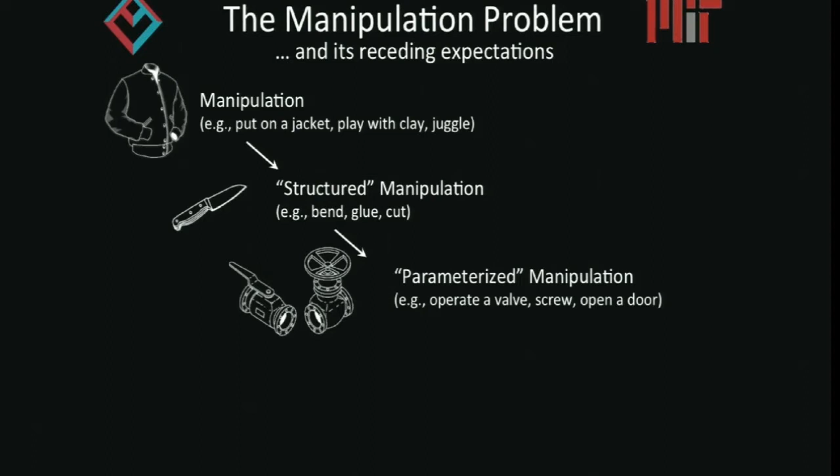You can go down a bit more to parameterized manipulation, where objects now live in parameterized configuration spaces. Imagine operating a valve, or turning a key, or a screwdriver, or some sort of rigid tool that moves along a certain path. Getting robots to do this is still a problem - we don't have good ways to design policies or plans to get robots to execute motions or actions like this robustly.

So we go down further - okay, forget about using whatever you're grasping, just think about grasping. How do we get an object into the hand of the robot so that hopefully then we'll figure out what to do with it.

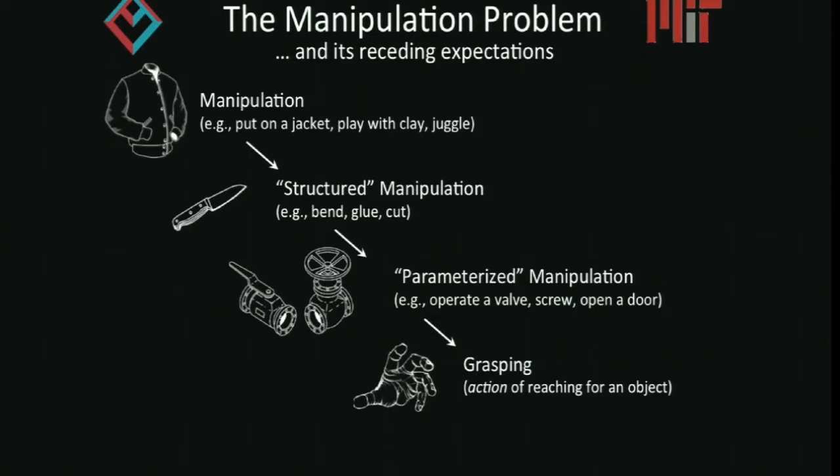And by grasping, I mean the entire process of approaching the object and thinking about all the dynamic contact interactions between the hand, the environment, and the object as you're closing on it. That's still something we don't know how to model, simulate accurately, or plan for.

So let's just think about grasp. I have some contacts on the object, and geometrically I can understand whether it's a good, better, or worse grasp. This is a problem where we've gotten some traction over the last 40 years, from geometric analysis all the way to neural network approaches to model grasp stability, but there's still big work to do.

More complex problems. So just as motivation for the rest of the talk, I want to give a little briefing on the work we did on the Amazon Robotics Challenge this last year, to illustrate, I don't know if we'd call it state of the art, but close to what grasping systems might be working like today.

So the Amazon Robotics Challenge, in case you haven't seen it, the basic idea is you get a container filled with objects like this, and you need to design an autonomous system to pick all these objects, identify them, and then put them in storage. And you have to do it fast and reliably.

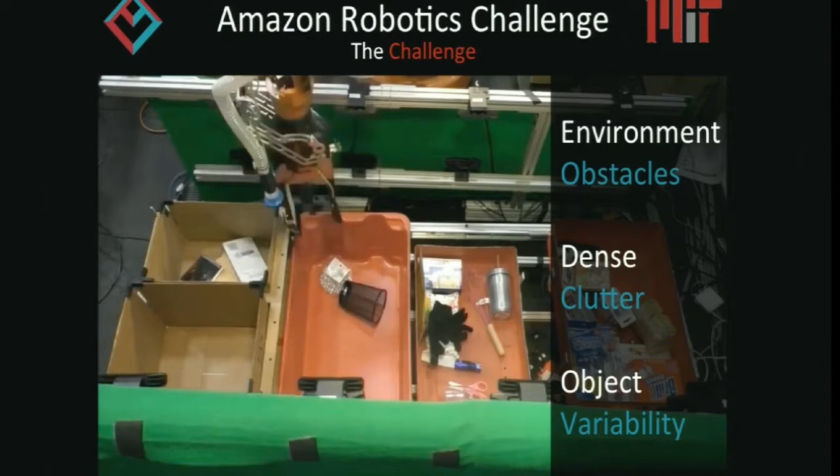Okay, so quickly, this is one possible solution, what we presented in the challenge. There's an arm, a gripper, some cameras, and a control loop. There's a computer driving the entire thing. So when you want to design a system like this, a pick-and-place system, you basically have to answer four questions that are completely interrelated.

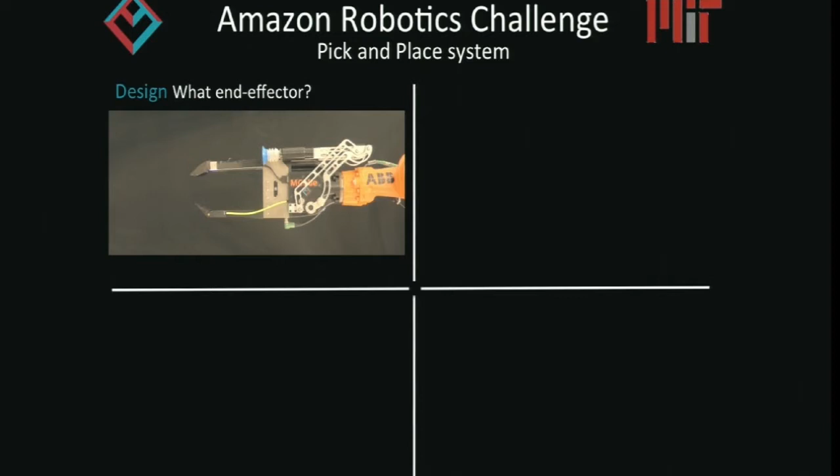So the first one is a design question. What end effector are you going to use? What is it physically going to touch the objects that you need to pick? Are you going to use a gripper or a suction cup or a combination of both? What are going to be the degrees of freedom? In our case, we decided to use a task-based gripper design.

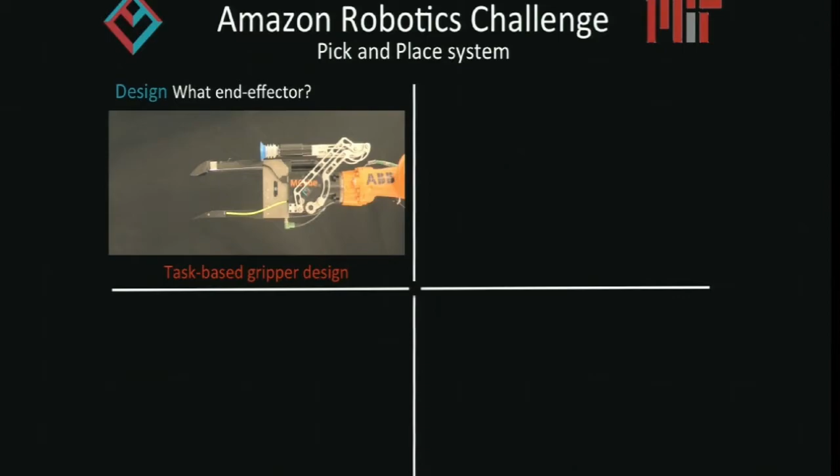Okay, cool. The idea is that you can incorporate some of the constraints of the task into the design of the gripper so that the task becomes simpler. So there's force control when it closes, and there's a spatula here that is compliant so you can touch things safely and squeeze in between objects. The suction cup goes far enough forward so the rest of the gripper isn't an issue when dealing with collisions. Anyway, you input task constraints into the design of the gripper.

The second question is what I would call manipulation. What is going to guide the design of the particular interactions between the gripper you chose and the objects? Are you going to use some sort of contact-based planner? Are you going to think about force control, or about the particular interactions in any given way? In our case, we decided to simplify the problem by looking just at a particular finite number of primitive behaviors.

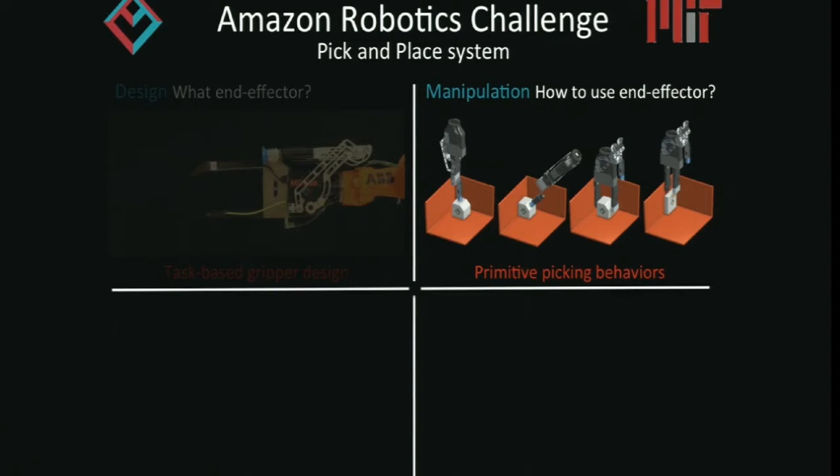So we thought, okay, if the objects are going to be inside this tote, and if the objects are going to be of these particular kinds, we think we can pick them all just by looking at suction down, suction side against a face, grasp down, and then flush grasp, where one finger gets in between a wall and an object. Each of these behaviors has its own planner, its own controller, and its own perception system, which I'll talk about in a second.

The third question is, once you have a gripper and you know how it's supposed to interact with the object, how are you going to use the robot to make sure the gripper can follow that path? How are you going to avoid collisions? How are you going to make contact in a safe way?

So you can avoid collisions by forcing the robot to move in safe zones so that you don't have to do collision-free planning, just for speed. Whenever after picking something, it just goes up and on top of things so you know it's never going to collide.

And we can make contact in a safe way by having guarded moves. So we have sensors that tell us the moment it makes contact so that you can directly react after that.

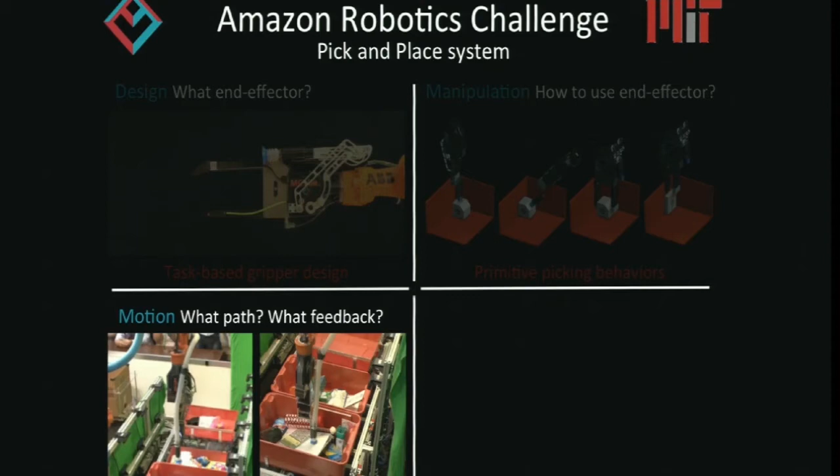And the fourth question is perception—where is the object and what object is it? This is a problem where standard research solutions are difficult to use. The standard pipeline of segmenting an object, identifying its pose, and then planning a grasp for that object is very noisy, because it's very difficult to segment something like a toothbrush from everything else when it just becomes clutter.

So instead, we decided to use techniques developed in the last few years based on affordance prediction for each one of the primitive behaviors. We train a neural network to say this area is more likely to be suctionable than that area over here, and we get the neural network to predict dense affordance maps for each one of the primitive behaviors. Okay, so maybe a bit more in detail how the system works.

There are two problems we need to solve. One is grasp selection—we need to come up with these affordance maps. And the second one is object recognition: after picking the object, we need to make sure that we pick the object we really wanted to pick. So this is what they...

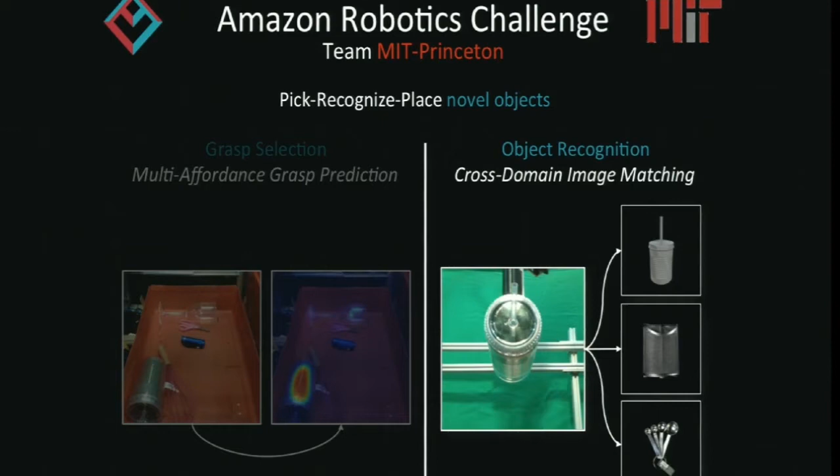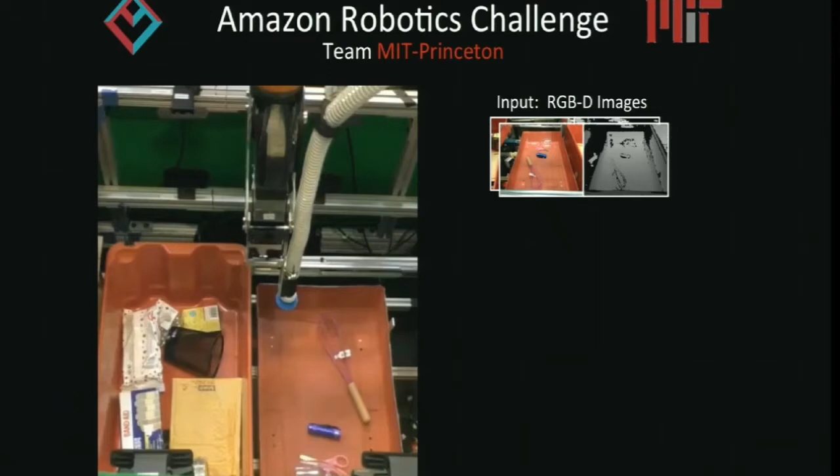So this is one particular moment in the challenge, and we get RGBD input images to the system—what the camera sees in RGB and depth. We pass these images through the neural networks to do affordance prediction on the things that look suctionable and the things that look graspable for different orientations of the gripper. We merge the heights and rotate them in different orientations to make the prediction of these affordances for each picking behavior.

Now, once the controller receives these predictions, the idea is I just need to look at whatever is more likely to succeed, and then go with that. In this case, it looks like this is the highest point from all the options, which corresponds to this grasp, and then the robot goes down and picks it.

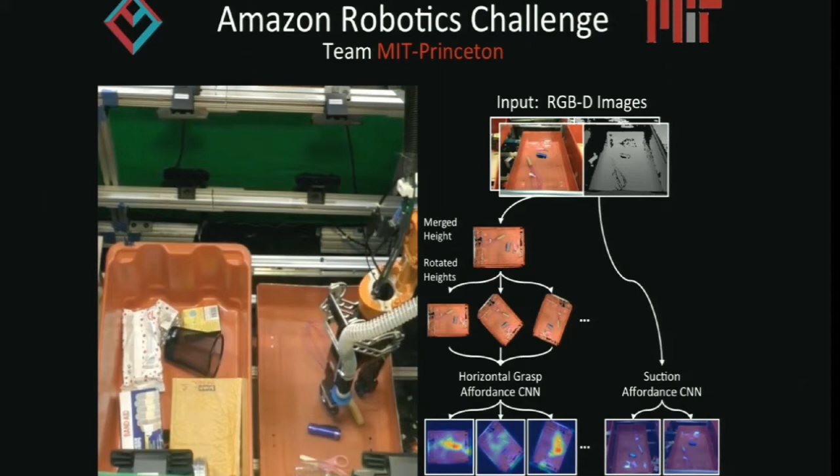And after that, it goes back up and shows it to the other cameras that do image recognition. It looks at this object and has to decide which one of the database of objects it is, and hopefully it makes a good prediction.

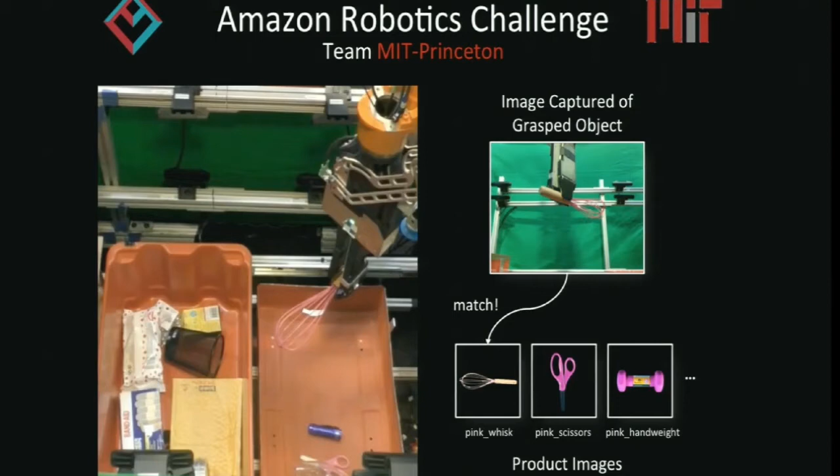This is also done with a neural network interface where we learn a feature embedding, where images like the product images look like the kind of images we capture in real time.

Why do we do this? Why do we need to learn a feature embedding? Because we've never seen these objects in real time—the only thing we have are product images, and matching directly from here to here is quite noisy. So how do we solve that problem?

We go to Target, buy about 250 objects, and get training data for these kinds of matches. Then we learn a feature space where they look as close as possible—where these two images map to as close as possible to the same cluster. Then in real time, we get a new object with a new real image, and hopefully it will get as close as possible in this new feature space.

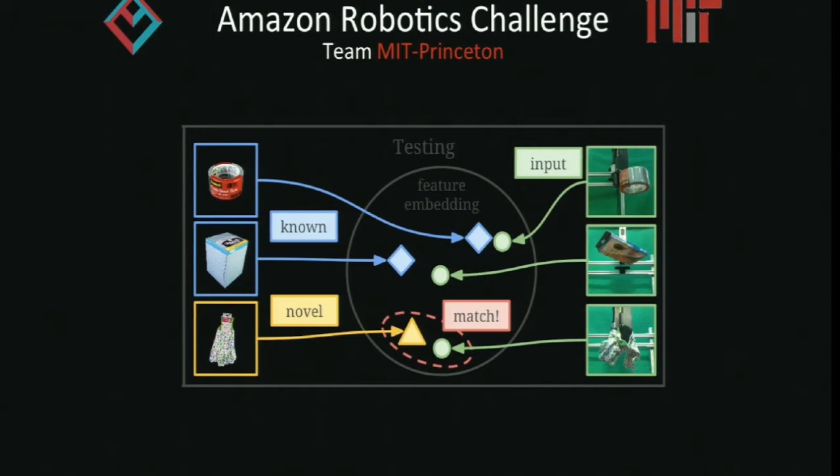I'm happy to talk more about the details. Once you answer these 4 intertwined questions - the decision of how you're going to use the end effector affects its design, and vice versa. The perception is designed for the particular behaviors you pick, and the path is influenced by what areas or surfaces of your end effector will make contact and where collisions need to be avoided.

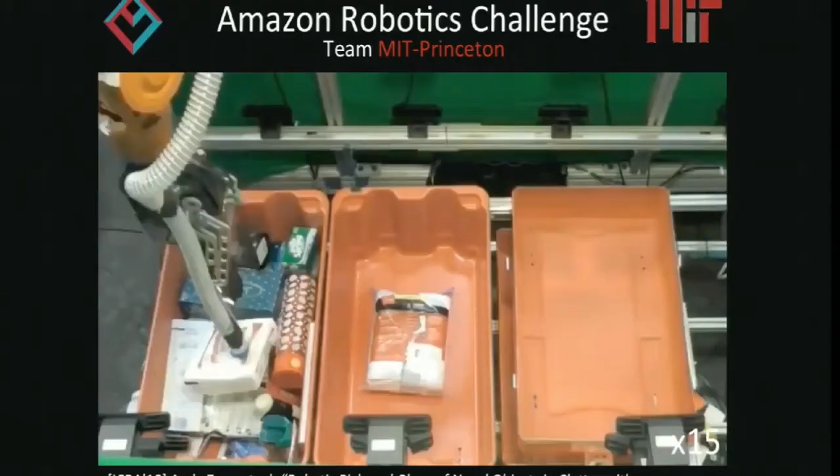But once you answer these 4 questions and spend a couple extra months debugging and improving the system, you can do runs like this. This is the official run of the competition's stowing task, where the goal is just to pick up everything and move it over here. This is sped up 15 times, so not quite 400 picks per hour yet.

So what is the key differentiating factor between this entry and other entries from the teams that participated this year in the challenge? I would like to say the key factor was that we were more clever and came up with a better system, but that's a vast simplification. It's not just that we're clever now.

There were a few things, right? The design of the gripper actually makes a significant difference - how mechanically robust it is and how much gripping force you can get while still being robust against overusing it or making collisions. The second thing is integration - to get this system to work well and run fast, you need to spend time trimming things down and making sure the output of the perception algorithm is compatible with the planner and the controller and everything.

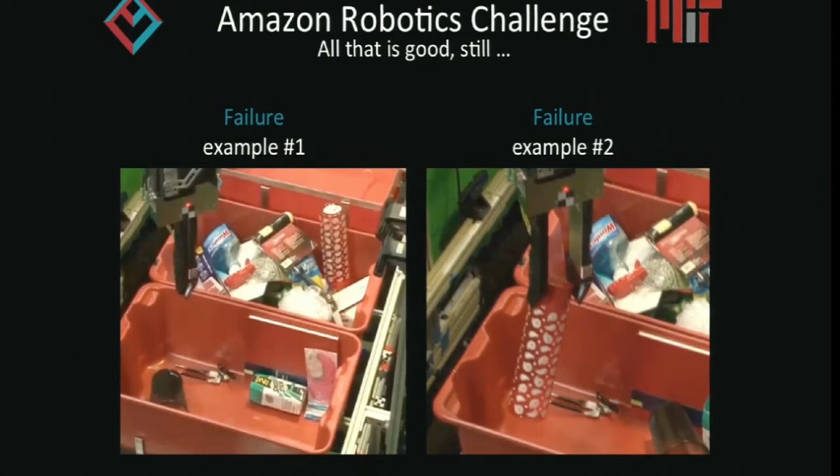So all that is good, but summarizing: planning is based on visibly accessible grasps - whatever we cannot directly see as accessible, we cannot pick. And control is based on open loop execution - I plan, I close my eyes and execute, and then I ask whether it worked or not.

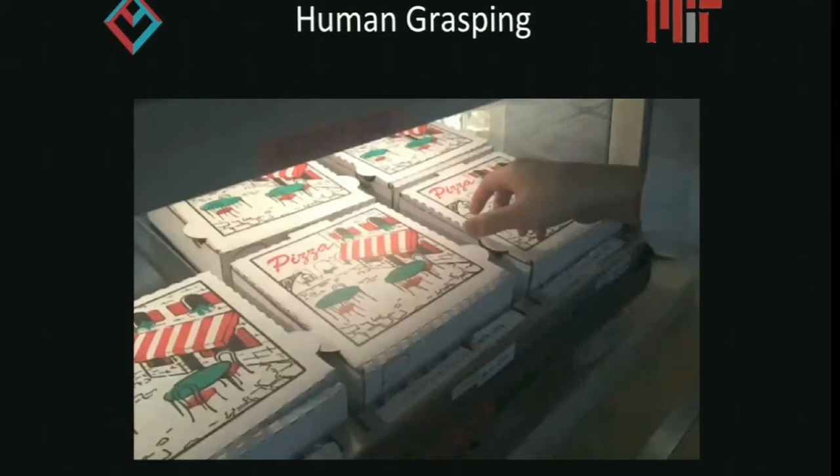So if we look at how humans do it - this is a cheap version of motivating the talk, but it's still effective.

If you want to pick up this pizza box, where is the open loop execution and the visibly accessible grasp of this pizza box that I can trigger to get it? There's none, right? There's no accessible grasp of this pizza box. Somehow I need to put my finger under this, or wedge my finger under here and hope that I can get it, which is probably not going to be an open loop task because there's going to be a lot of random noise as I'm squeezing there. So there's going to be some replanning involved in that.

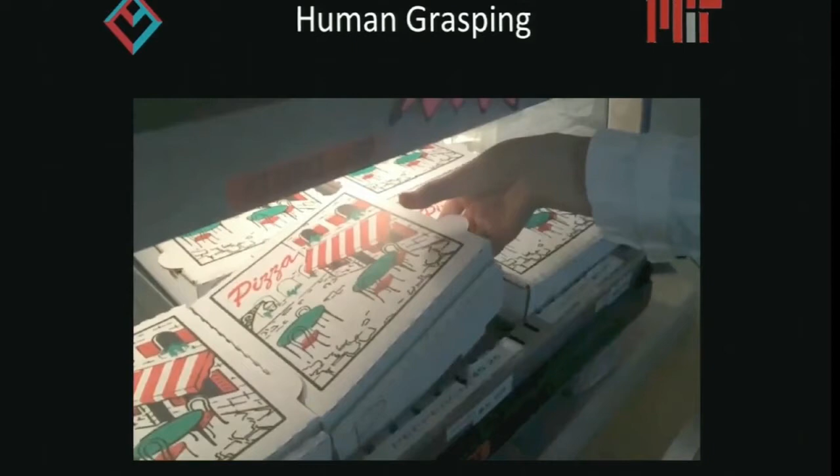So there's some spirally motion of the fingers as it's going down, and finally, first it picks up the lid of the box, which it didn't like. Oh, wait a second, it's going up, so I'm just going to continue, and it works. So this difference between grasp and grasping, between thinking about grasping as a static condition or thinking about grasping as a process, or as a reactive process, it's sort of like what drives my interest in the problem and what I think we haven't figured out yet how to solve, how to think or how to plan for those grasping motions.

So how does this look like in the context of a real human grasp? So imagine you have a book in a shelf.

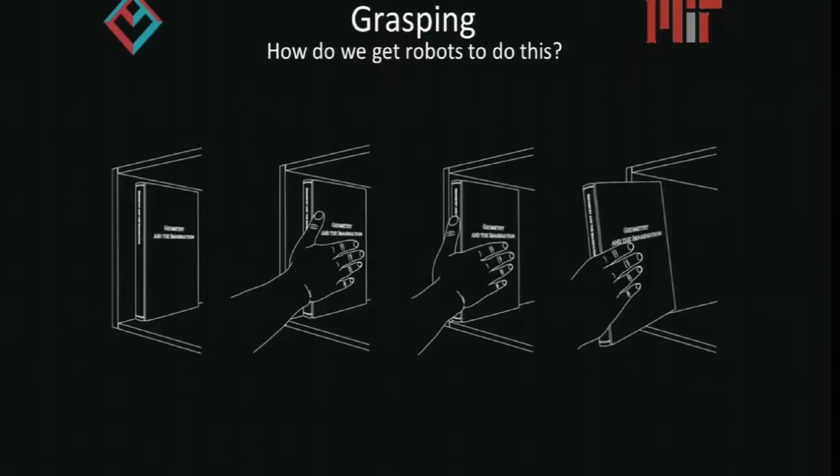But this entire process is something that has to be planned for. I need to make sure that I understand that I can pull the book, I understand the implications of putting my thumb here, and I understand that my thumb is fast enough to go to the other side before the book falls.

So how do we get the robots to do this? Big spoiler, I don't know, but here are some things that I believe are essential to move in that direction.

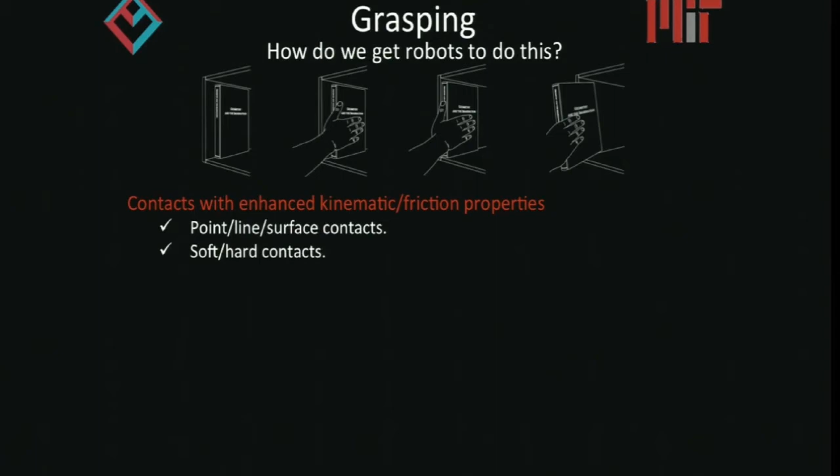The first one is being able to plan or understand contacts that are enhanced, so to speak—contacts that are not just the classical point contacts that we use in geometric grasp planning. So the palm is using an entire face contact, and at the same time is using the face contact of the wall of the shelf to be able to track this motion.

So having a thumb is great. We can do opposable grasps, but at the same time it also allows us to get it out of the way so that we also have a palm. Being able to have a gripper that can do palmar manipulation and at the same time prehensile manipulation in the same gripper, that would be fantastic. So on both the hardware side and the modeling side, it would be great to master that.

Rich friction dynamics, right? These kinds of motions involve a lot of slipping. If I wanted to do this just by sticking contacts where nothing slips, it would be very clunky. So being able to master slipping at the same time that we also exploit sticking would be great.

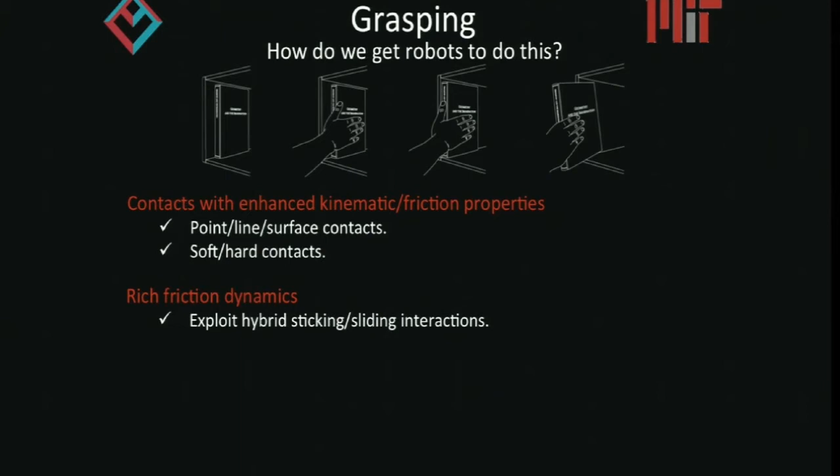Reactiveness, right? Many of these motions are very noisy, and it's very difficult, or I think it's hopeless, to try to have models that are very accurate. So a layer of reactiveness is necessary, being able to replan maybe.

And finally, tactile sensing. A lot of the action happening during this motion is very difficult to observe visually, like the small amount of slipping between the hand and the book. Is the book slipping on my hand, or is the book coming outside with my hand? You can see it with your eyes, but it's probably too late already. So being able to use tactile information there in the control loop is essential.

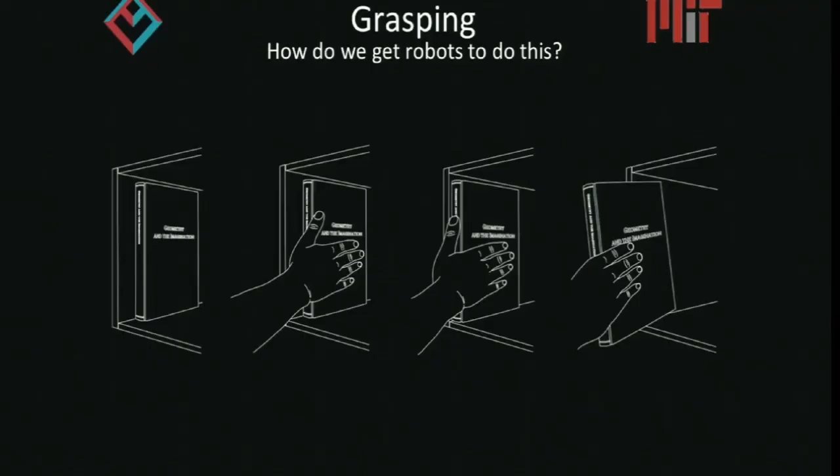Okay, so by the way, these points are changing over time. Every time I give this talk, these are slightly different. So if you have any intuition, any ideas, any comments about things that are missing here, or things you would change or phrase differently, I'd be more than happy to talk about.

Okay, so how do we get robots to do this? Now is where the second part of the talk comes, where I tell you we're working on these problems, and I want to show you a little bit of the kinds of things that we do. But before that, any questions? No need to? Just making sure.

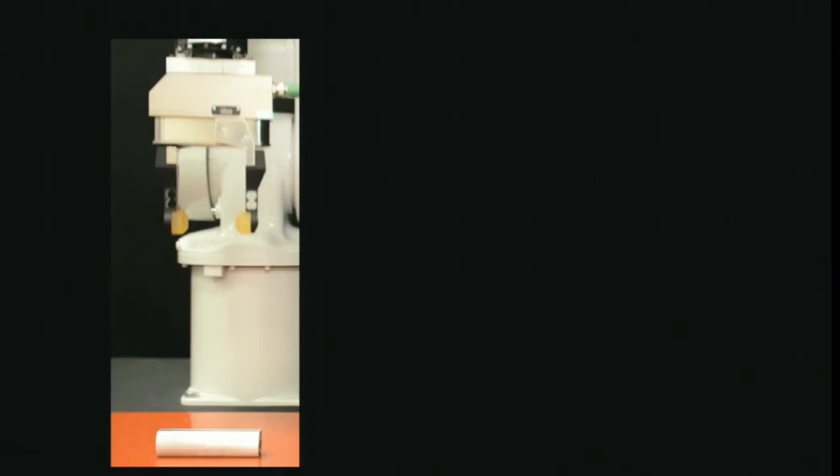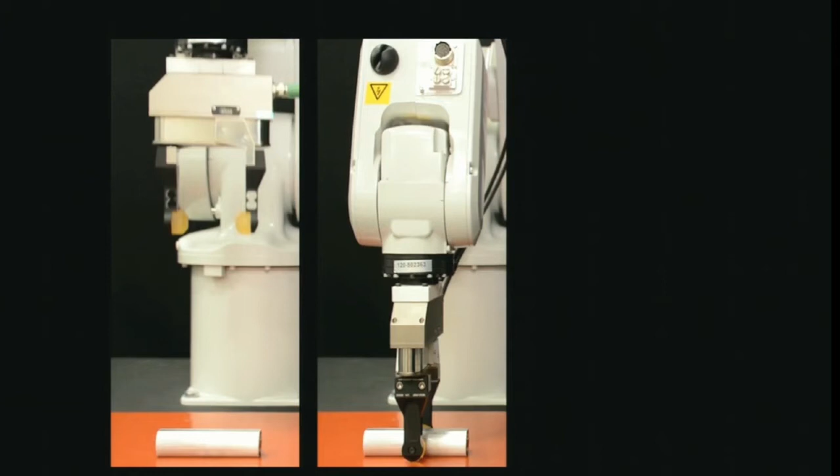All right, so the first research problem I'm going to talk about involves in-hand manipulation. This is a classical problem in industrial manipulation. You need to pick up an object, and maybe we have some sort of affordance-based predictor of where to put the fingers, and we go to grasp it successfully.

But then it turns out that to use the object, this is not the right grasp. We need to have the object like this. So having a small amount of in-hand manipulation capability, even with simple grippers like the kinds that we have in industry, would be very useful.

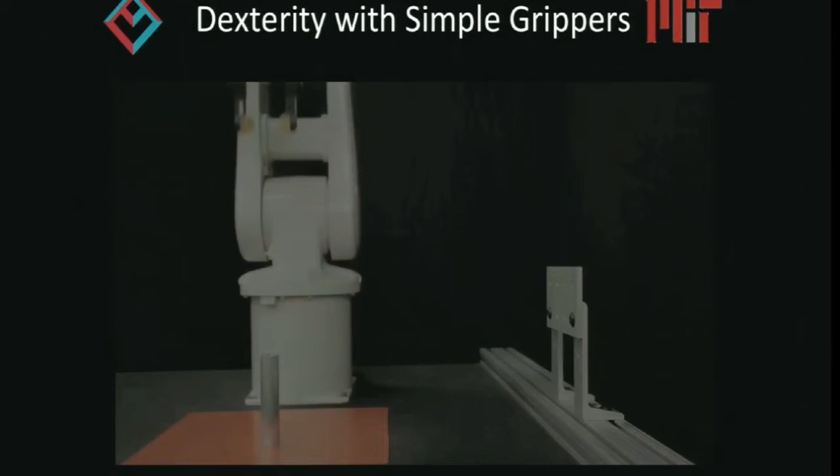And we've been looking into the idea of using the environment. Some of you might have seen this video already. This is sort of a video that Nikhil, the student working on this problem, cooked up manually. This was all manually programmed a couple years ago, just as motivation to show that the robot can do these things. It can use rolling to get the right grasp.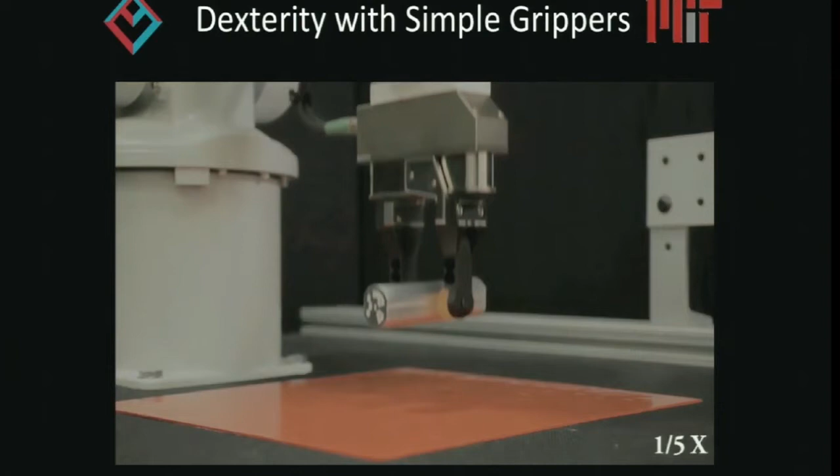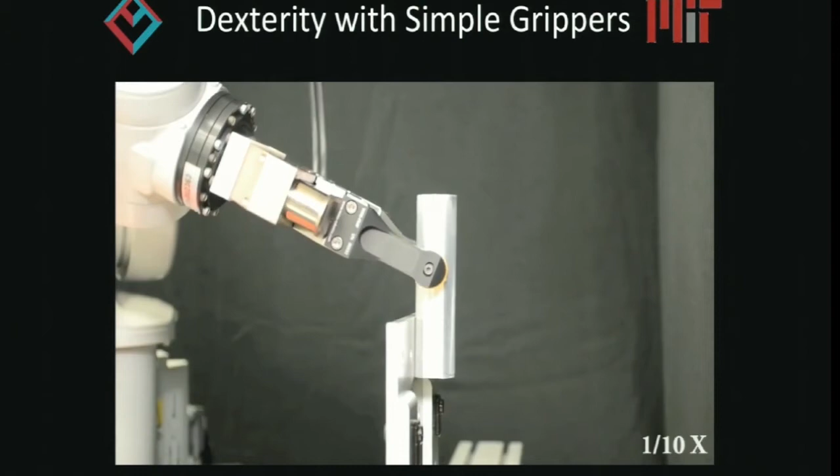And it can push against a flat face to change slightly the grasp. And it can pivot the object very accurately and very fast - this is like 1/10 speed.

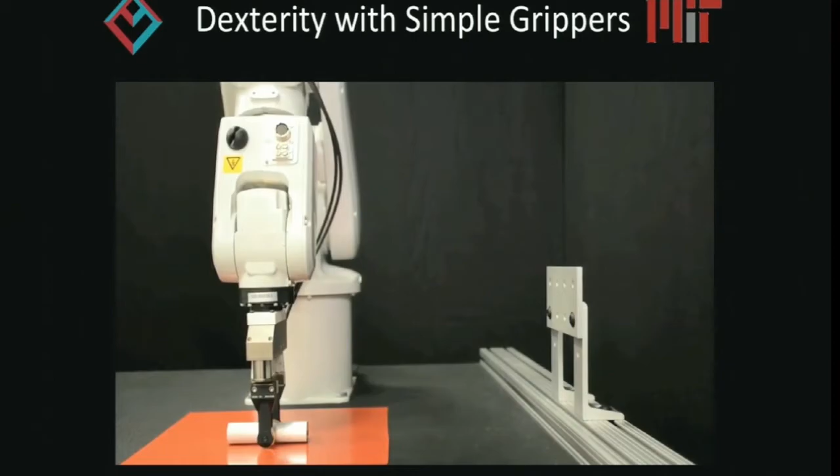So how do we get there? How do we get the robot to understand the mechanics of those processes and plan for these motions autonomously? Okay, so we want a planner that respects friction, that respects at the very least our basic understanding of how we model contact in robotics - so respect Coulomb friction,

and respect the principle of maximal dissipation, and respect the fact that rigid objects are rigid and that there's no penetration - so that if it wants to move the gripper from here to here,

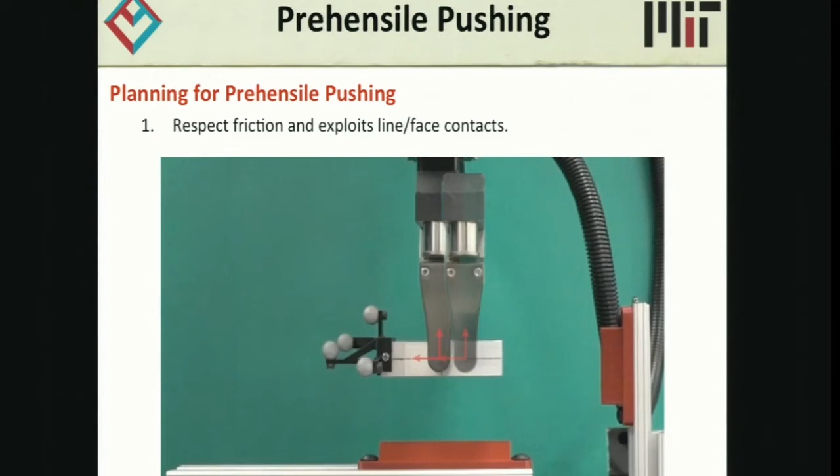it understands that if it does a straight push over here, the object is going to fall slightly, because Coulomb friction says that if there's a sliding motion in this direction, friction has to be opposed to the sliding motion. So there's not enough friction in the vertical direction to sustain gravity, so it will fall down. So the planner knows that and figures out to compensate for that.

If the only thing we tell the planner is what is the coefficient of friction of everything, the geometries of all the objects, and the goal of the initial grasp and the final grasp.

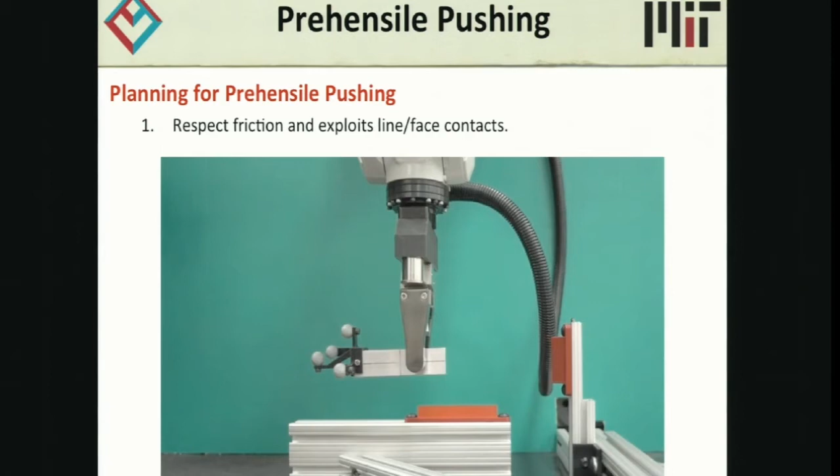We want a planner that, as much as possible, will do continuous pushes. So just for efficiency, if it has to change this grasp from this grasp to this one, it will do it in one continuous push, like in this case.

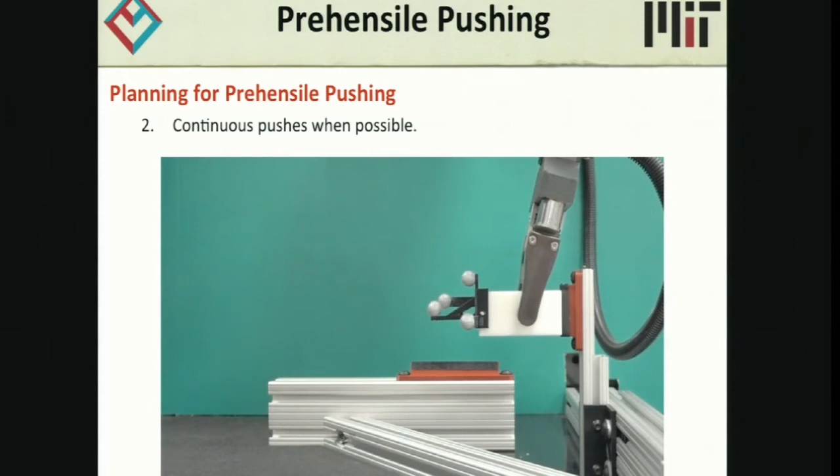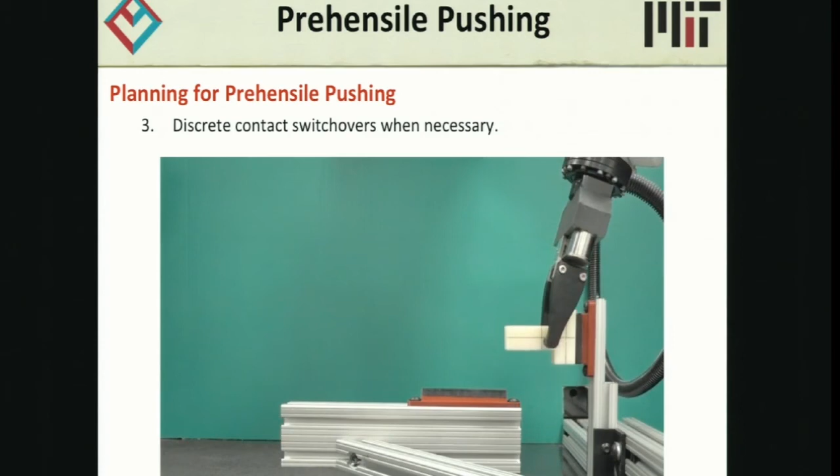And we want a planner that, whenever necessary, can also concatenate different pushes to change the grasp on a more complex object. Like in this case, first there's one push, and then a second one down to do the regrasp. Okay, how do we do this?

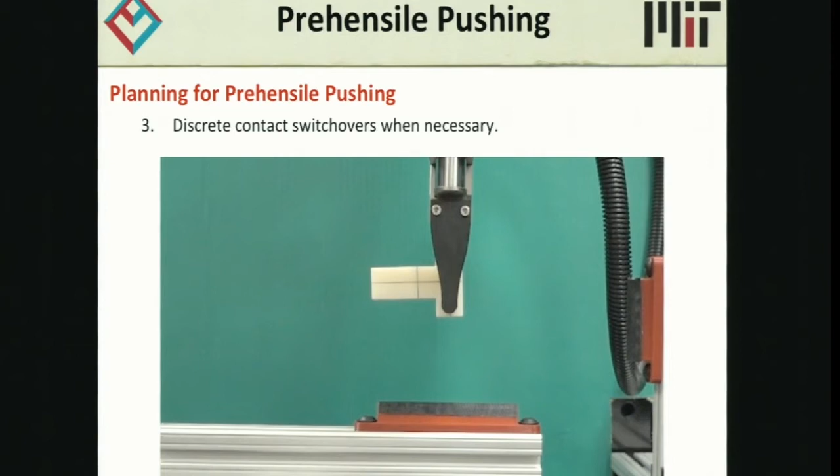Well, the idea is to combine a low-level optimization-based model of the contact dynamics to account for all those facts, like Coulomb friction and maximal dissipation and rigidity of rigid objects. Combine it with a high-level RRT-based sampling planner that can incorporate the discreteness of jumping from one pusher to the second pusher.

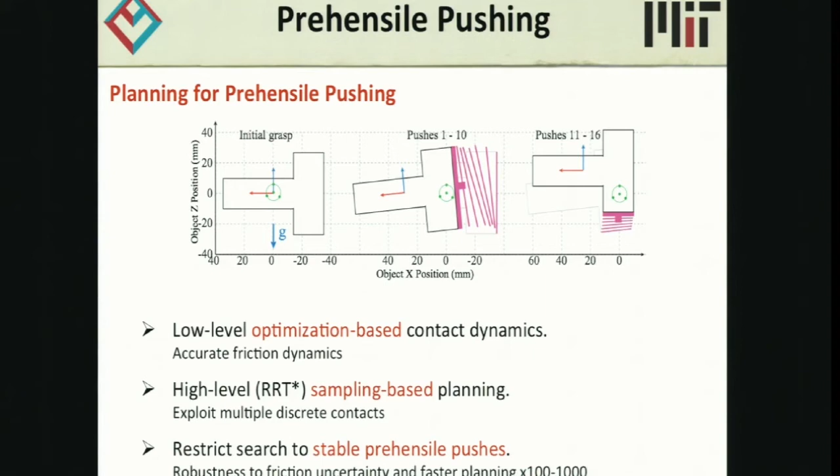And finally, this is the minimum you need to have a planner that can come up with those regrasps. As I'll show in a second, this will give you a very slow planner. Then you have to look for tricks to make it faster.

So if you just do standard linear complementarity formulations for contact, you can come up with these regrasps, but it takes on the order of hundreds or tens of thousands of seconds to get to those regrasps, if you want accuracy.

It turns out that there are easier ways - you can give up a little bit of the dexterity you would have with the full problem formulation, just by imposing that every time the object is moving, at least one of the contacts is sticking. The other ones can be slipping, but one of the contacts has to be sticking. This is analogous to stable pushing in non-prehensile manipulation, if you're familiar with it, from Kevin Lynch.

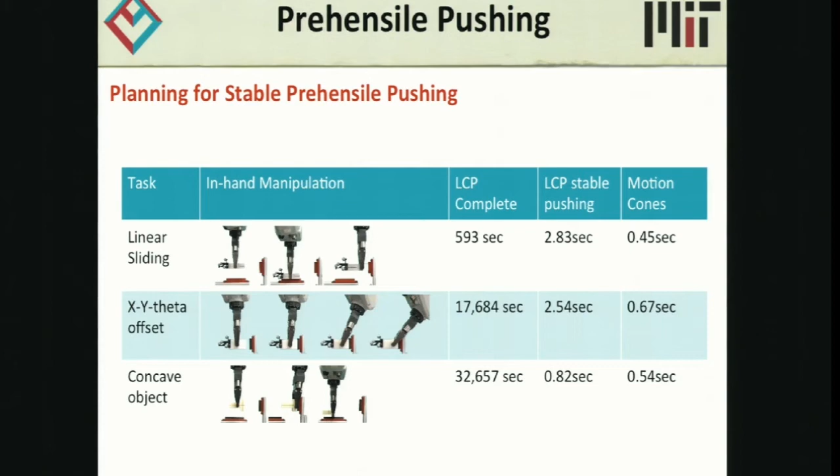If you put that condition with the same complementarity formulation, you bring the times down to just a few seconds, and you can reduce it further. This is more recent work using motion cones to model that, to pre-compute stable pushing directions where you can plan for these things in less than half a second.

So we've been working on formulating the mechanics for a while, validating them with experiments, planning for sequences of external pushes, and doing it fast and faster in current work.

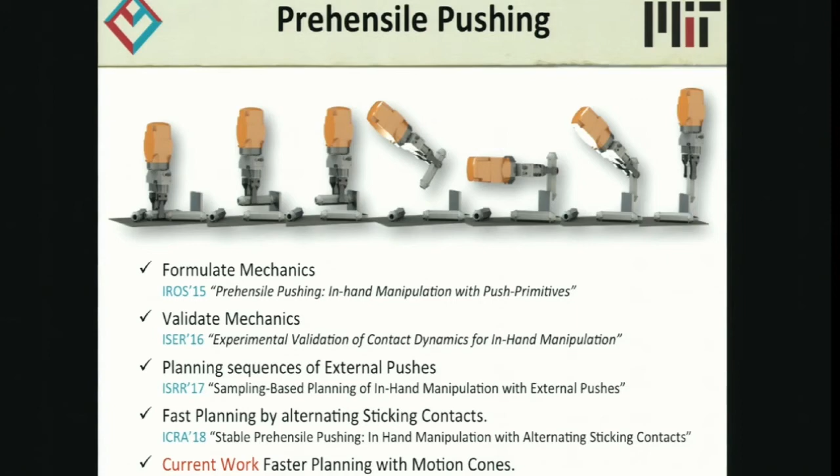This is all Nikhil's work. And now we're starting to work with Delta and Lenovo. They are two automators that are interested in trying to bring these to assembly lines.

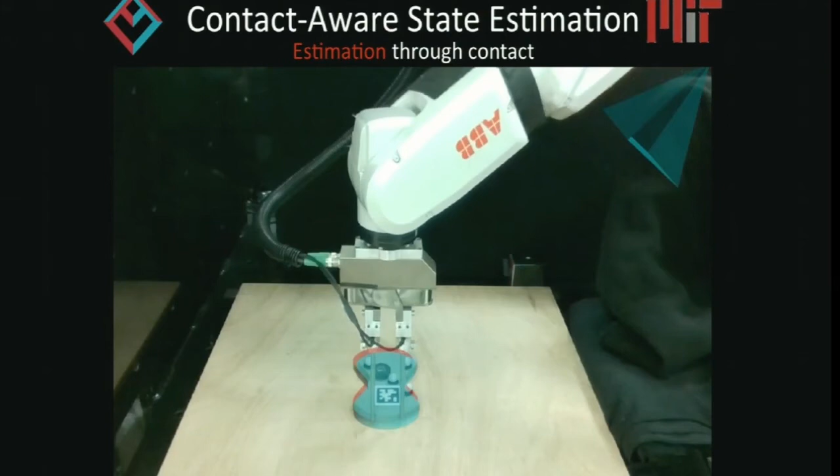Any questions? Okay, so second problem, also related to contact. We're saying using tactile information is essential. I think it's essential to be able to track the pose of the object while you're manipulating it, so that you can be reactive about it.

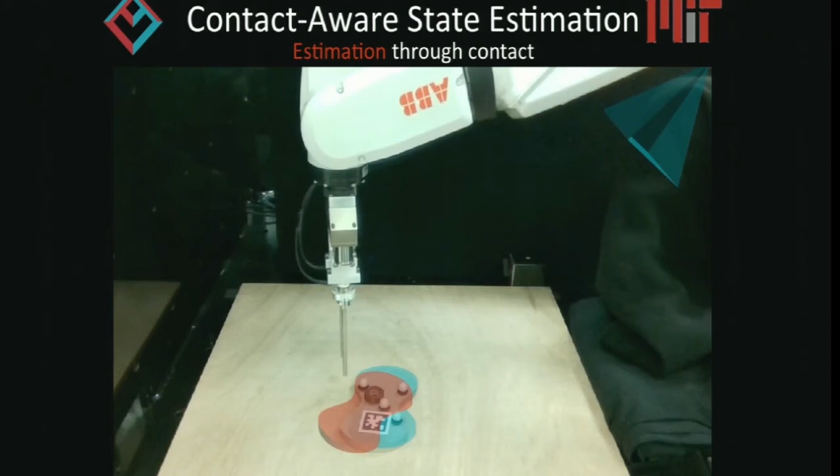And if you just constrain yourself to use vision, you have intrinsic limitations, right? There are going to be occlusions, and there's going to be low accuracy that won't allow you to do accurate in-hand manipulation.

So we've been looking into the problem of how to fuse tactile and vision information in real time. This is inspired by work from the estimation community, the SLAM community, on coming up with fast ways to integrate constraints from different observation models or from different models that are guiding the interaction.

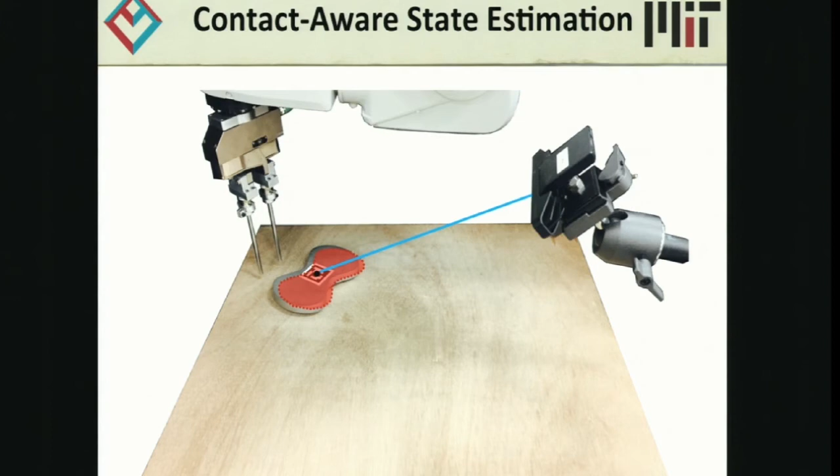So the basic idea is that if you just use a cheap camera to detect where the object is, you may get a certain amount of noise, but the moment you make contact - and this is an abstract version of a manipulation problem, these are just like 2-point contacts so we can think about where the constraints happen - the moment you make contact, you know that the object cannot be in penetration.

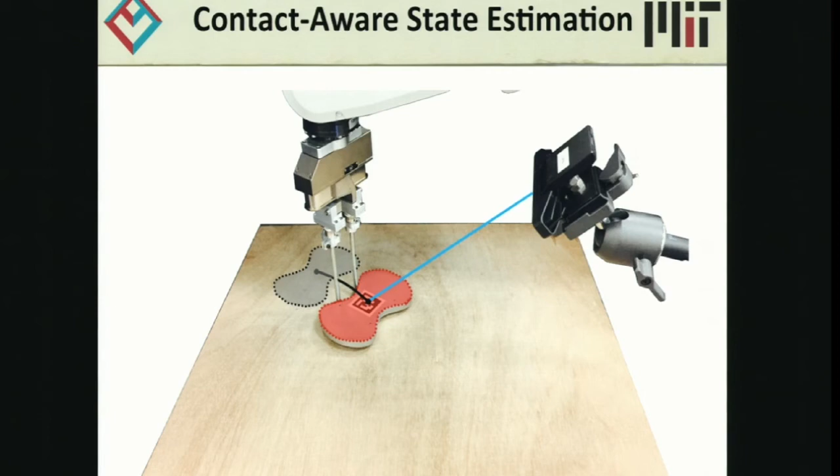And it cannot be in separation, it has to be in contact right there. So that adds a constraint to your estimation problem that hopefully you can use in real time to get a better estimate of where the object is. And with a certain horizon, even if there's an occlusion, hopefully you can track the position of the object.

Contact only gives you local information, so that's information that over time is going to degrade, but you might be able to use it for some time. This is just an illustration.

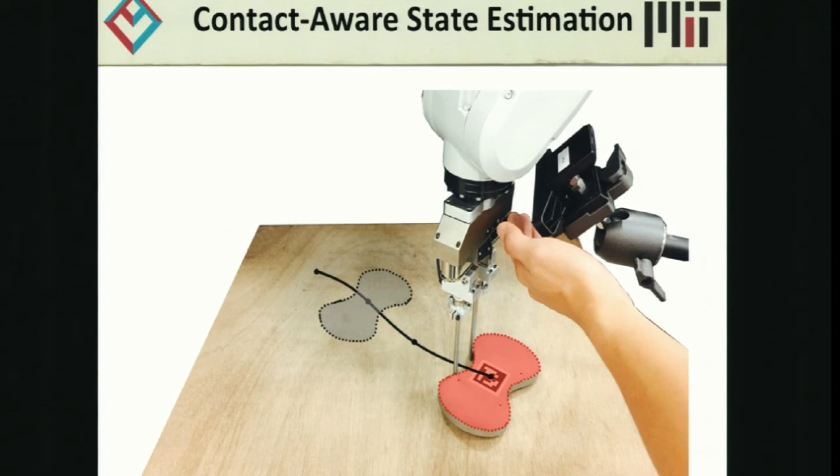So the basic idea of the experiment we've been working on is we get ground truth with a Vicon system, so we know precisely where things are. And we get ground truth with force torque sensors here of the forces at the interaction.

And then we have a cheaper camera, a webcam, that uses the Apriltag to get a noisy estimate of where the object is. There you go - noisy vision, contact location, and pusher motion. And we know the action that the robot is doing. We want to integrate these 3 sources of information in real time.

So the output is the pose of the object. And as I was saying before, the challenges are noise in the observation, occlusions, outliers, for example, in the estimation of maybe the Apriltag.

I don't know if you've ever worked with them - it gives you a pose of the object which is like 90 degrees rotated. So you want to smooth those events, right?

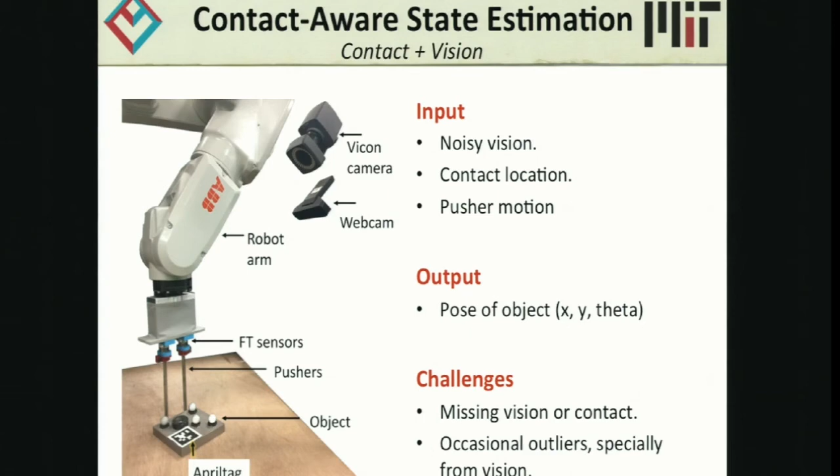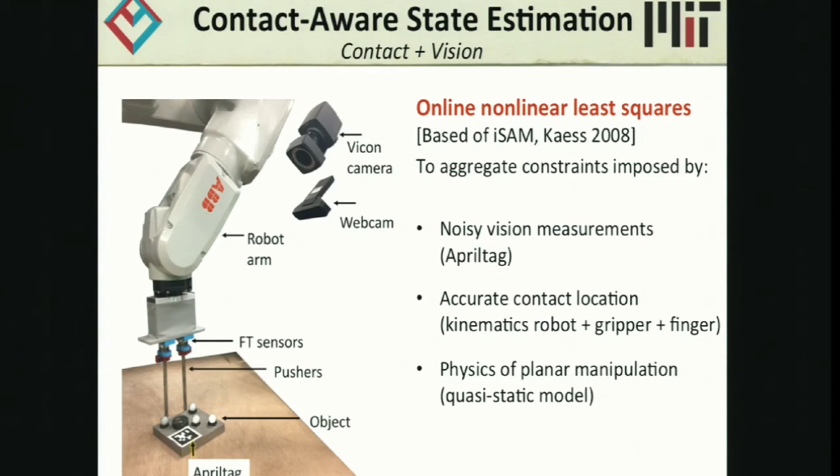Okay, so we use techniques from the SLAM community that integrate these constraints very fast by keeping track of the covariances between the noise in each one of the constraints in real time so that we can integrate all these measurements. And once you do that, you can recover the pose of the object at about 100 hertz.

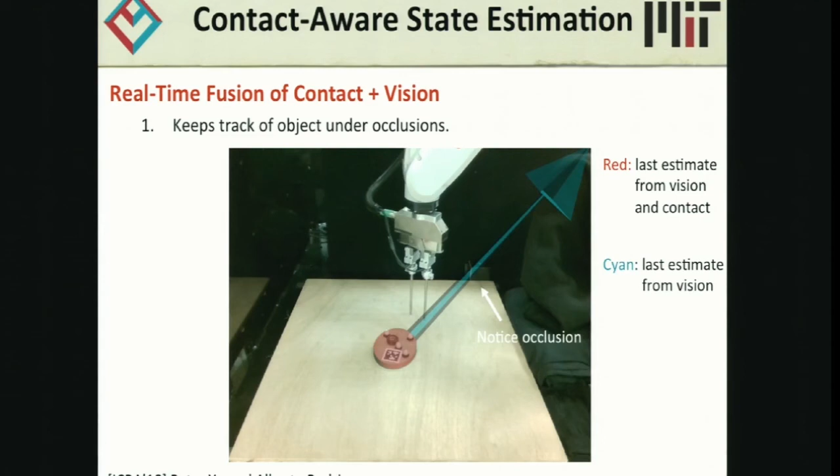And here's just a couple illustrative examples of things you get. There's an occlusion here, and while blue is the last estimate from the webcam, red is the real-time estimate from the filter. So we can track in real time where the object is.

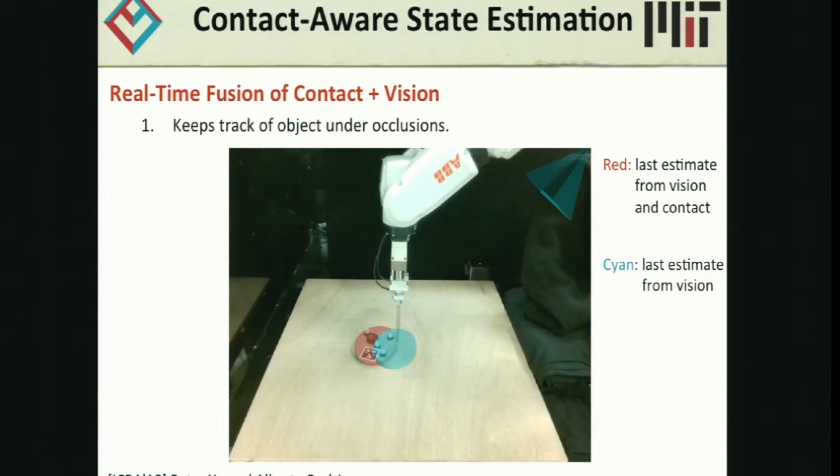Similarly, you can get more accurate estimates simply because you know where contact is happening. So while blue is the estimate from the webcam, red is the estimate from contact as it's reported by the filter.

So these are a couple things that you get, or that you can possibly benefit from, if we were to integrate tactile sensing or contact sensing in the state estimators.

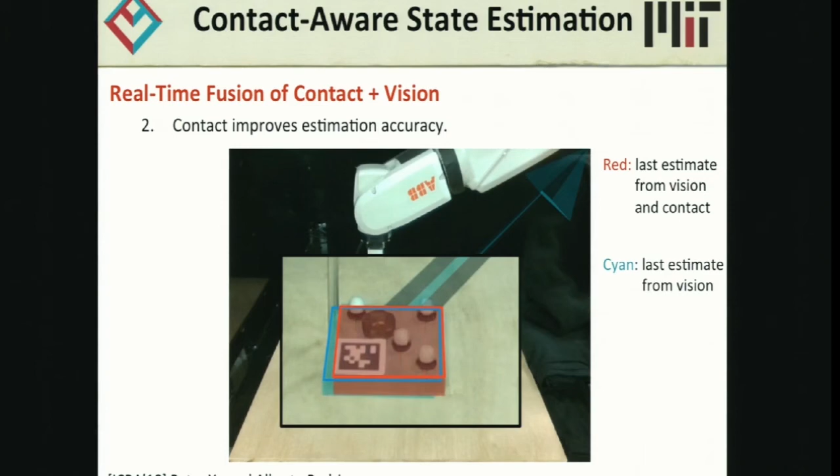But the problem is that this only works in simulation. The moment you try to do it with real data, where the noise is coming from real data, this degenerates too much.

So this is sort of the motivation that led us to investigate and do all the experimental work on planar pushing and the data sets, if you've seen them. And after that, with a better idea of the models of the noise and the dynamics, we went to online with real experiments.

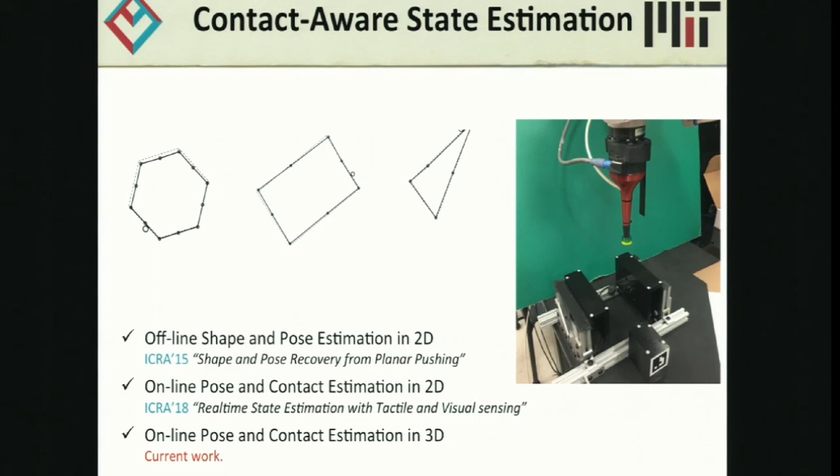Which is what I just showed before. And now we're looking into moving into 3D problems, like for assembly, for example, where we want to integrate force torque sensing with noisy information from vision to get a better estimate of where the object is to do an assembly, but recovering it in real time so we can use this to guide the assembly.

Okay. This work is from Peter Yu, who is close to finishing, probably this semester.

And finally, sort of to close the loop, I thought I would throw a few slides here about the work we're doing on trying to bring some of these techniques to a real problem, right? Like picking up an object out of a bin. Part of the problem is that we don't have the necessary tactile feedback that we could use, hopefully, to feed those estimators.

So we've been working on integrating tactile sensors at the end of the fingers of the grippers we're using for grasping. And this is a refactorization of a type of sensor that was developed many years ago called GelSight, where there's an elastic membrane, a polymer that deforms under contact, and there's a camera that looks at the reflection of a mirror.

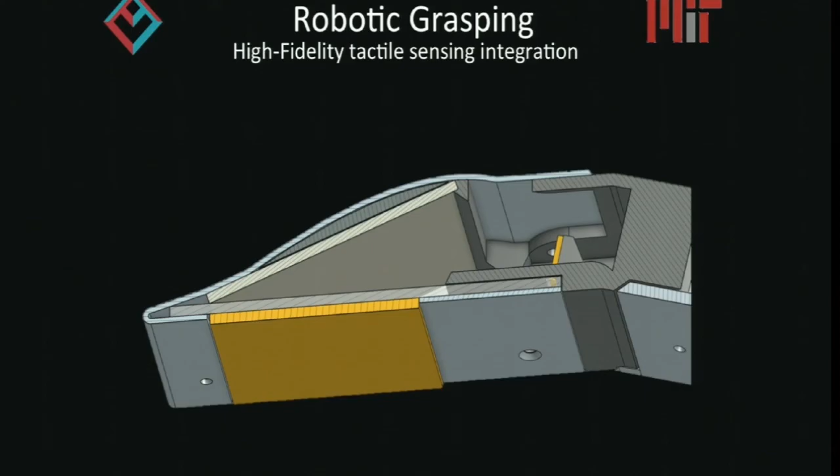And by looking at the changes in the deflection of this membrane, we can get some intuition about what is touching here. So the original GelSight is kind of bulky, and we've been working on how we can refactor the optical path and the illumination into the sensor so that we get it into a functional form.

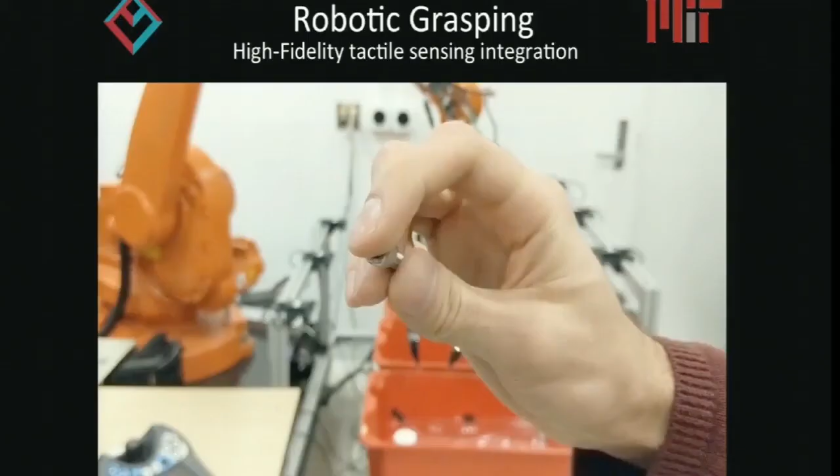This is how it looks, the current prototype. This is the sensor. This is the sensorized part. And here's just a short video of the kind of feedback that you get. You can see here.

We've been working on a couple of things. One is refactoring the form so that it fits within these fingertips. But second, also working on the ruggedness of the sensor, on the robustness of the sensor.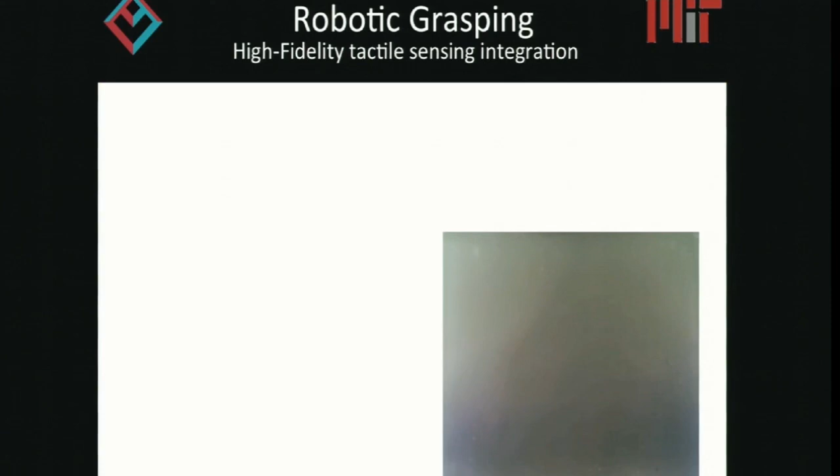So GelSight, because it's a polymer, it wears over time, especially if it's under stress, like when you want to do a sliding experiment. If it's just pressure, it's more durable, but if you want to do this kind of rubbing motion, it wears out fast.

So we've been working on re-engineering the materials for durability, with a small price that you have to pay on resolution—think of it as a low-pass filter. And at the same time, adding also a piece of cloth on it, which again works as a low-pass filter, but increases significantly the durability of the sensor.

We've gone from being able to do a couple hundred grasps before the sensor wears out, to doing thousands of grasps, which I think is still not enough. We have to go farther than that, but it's something.

So the texture that you see here is actually coming from the cloth. So you lose some of the resolution that you had on the accuracy of the shape of the object that is in contact. The texture is actually useful for detecting slip also, so it gives you markers to keep track of if things are moving or not.

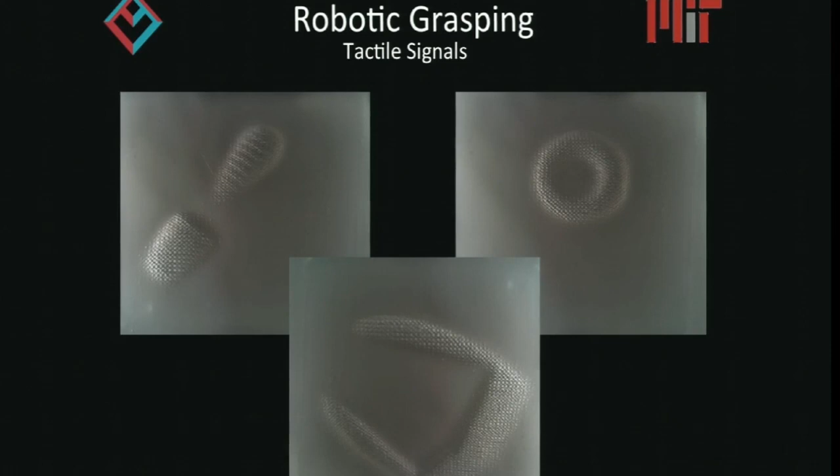Anyway, so these are example images of what you get. How do we make the robot react in real time by using that tactile feedback? We don't know, but our robots are working on it, right?

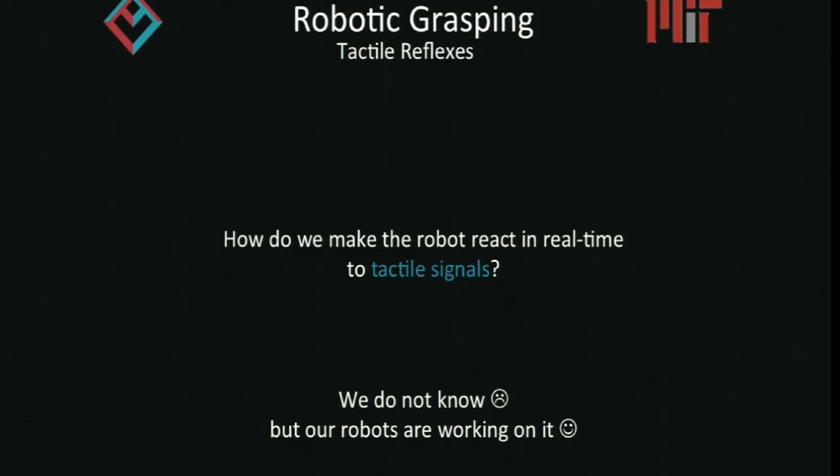So we're sort of embracing the learning approach, and we've been working on developing this infrastructure so that the robot can stay overnight moving things from side to side and gathering these tactile signatures of what it feels to successfully pick up objects, or unsuccessfully do it. And we're moving in that direction—Elliot working on the hardware, and Francois and Maria working on the control loop.

All right, and that's all I have. Have any questions?